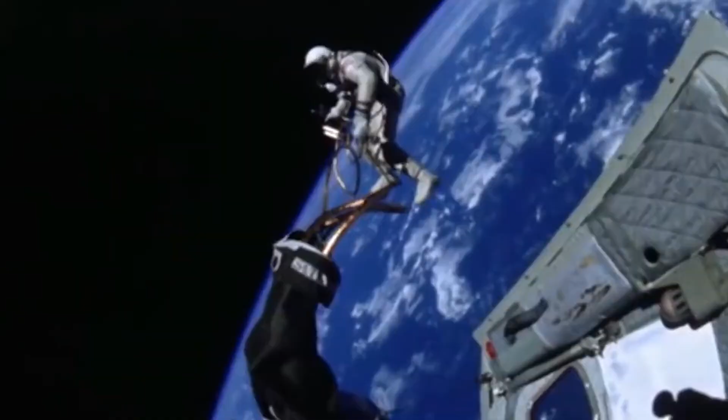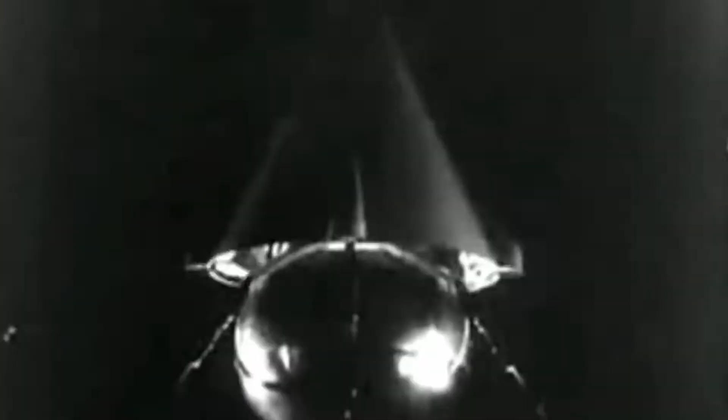On September 12, 1962, President John F. Kennedy made his famous speech about landing a man on the moon by the end of the decade. At this point, NASA had just several hours of human spaceflight experience. Americans had accepted the space race would be won by the Soviet Union, who had already claimed the records for launching the first satellite and the first man into orbit.

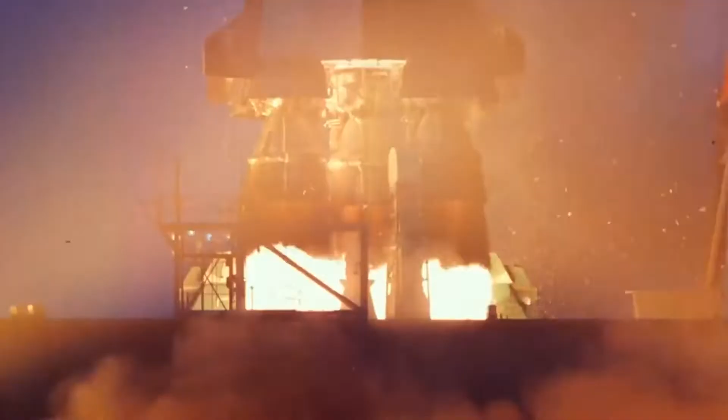In order to achieve their goal of reaching the moon, NASA needed to develop a much larger rocket with engines more powerful than ever before. But scaling up to a much larger rocket design sent NASA engineers into a new world of complex problems. In this vlog, we will tackle the problems encountered by scientists during the space race regarding combustion instability in developing new rocket engines, especially kerosene-fueled engines.

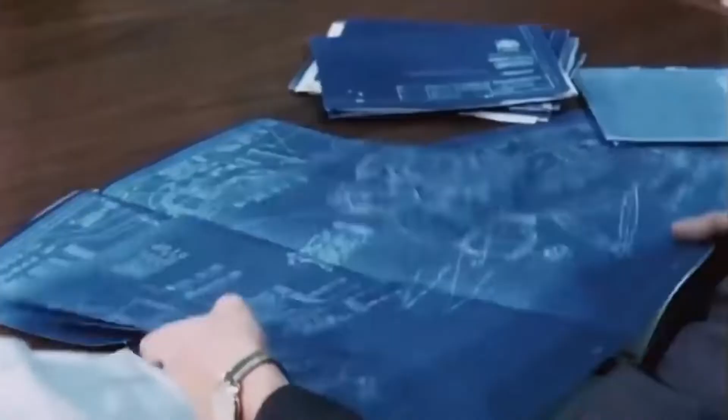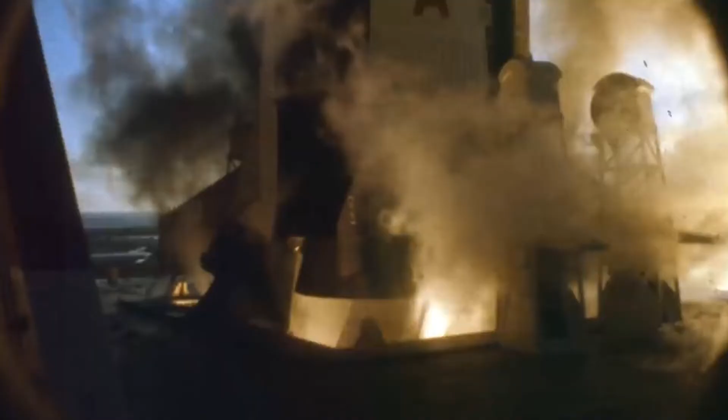Developing a new rocket engine on a much larger scale is extensive and expensive. This is because it needs the ability to capture detailed measurements of combustion dynamics, a physical understanding of unstable combustion mechanics, and high-quality data to draw hypotheses. The reason people in the 60s were able to develop a kerosene-fueled rocket engine, like the Rocketdyne F1 engine used in the Saturn V rockets that took Apollo astronauts to the moon and back, is by using heritage design and extensive development testing to provide reliable and high-performing engines.

There are actually several types of engine cycles used in rocketry, but in this video we'll be focusing on the staged combustion cycle, specifically the ORSC, or Oxidizer-Rich Staged Combustion.

I think I forgot the definition of Oxidizer-Rich Staged Combustion. I think I have to ask Nora about this.

Hi Nora, I would like to ask if you know about the Oxidizer-Rich Staged Combustion engine cycle.

Hi Brendan! So, Oxidizer-Rich Staged Combustion engine cycle offers improved cycle efficiency and density-specific impulse by using hydrocarbon fuels with an oxygen-rich pre-burner exhaust as the oxidizer, unlike other engine cycles.

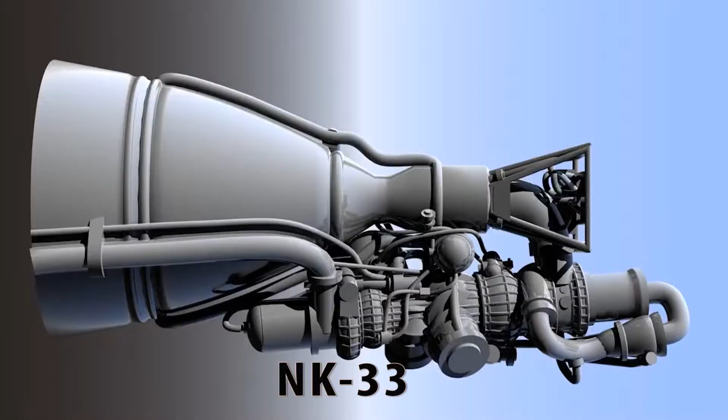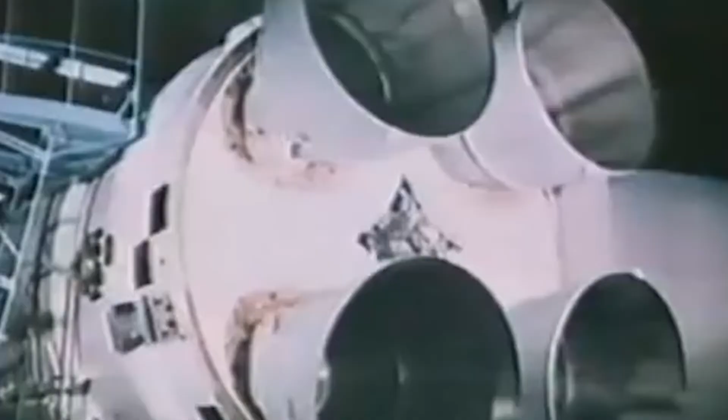This type of staged combustion engine cycle started in 1959, developed by none other than the United States' biggest competitor during the space race, which is Russia. They developed the NK series engine by Kuznetsov Design Bureau and the RD series engine developed by the Energomash Enterprise. These two series represent the most well-known, reliable, and high-performing ORSC engines.

Despite its advantages, the ORSC cycle also presents many challenges associated with achieving high performance efficiency. So another question is, what are the challenges in developing an ORSC cycle?

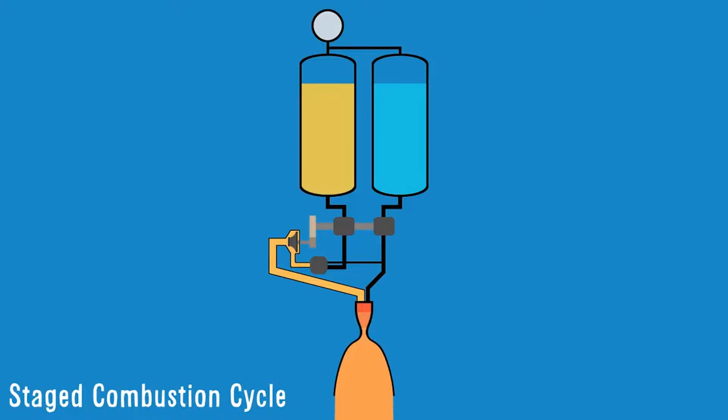One of these challenges is its high main chamber pressure that results in increased heat flux, or thermal energy transfer from one substance to another per unit time and area, denoted by temperature change. Second, it requires increased cooling and specialized materials to handle the aggressive oxygen-rich environment. Lastly, there's an increase in risk and severity of combustion instabilities.

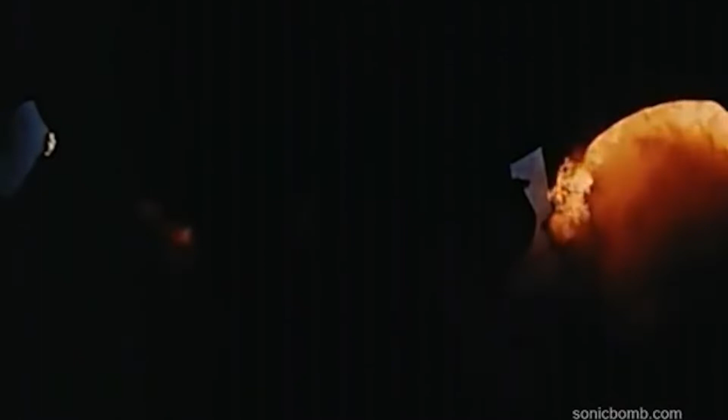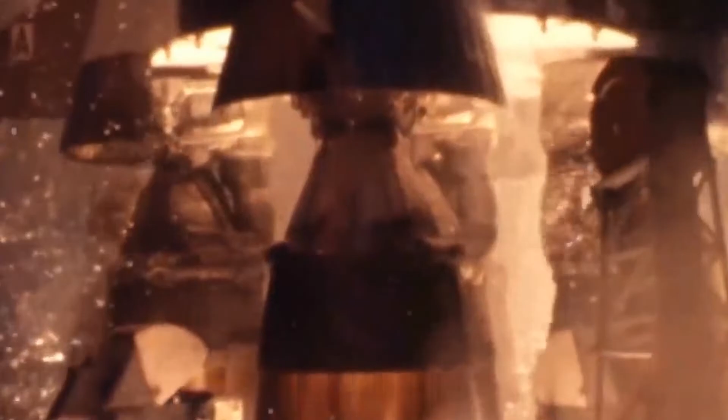The most well-known example of combustion instability happened during the development of the F1 engine. In order to lift the enormous Saturn V rocket, NASA required 5 F1 engines on the first stage, capable of producing 1.5 million pounds of thrust. To achieve this amount of thrust, massive amounts of RP-1 fuel and liquid oxygen had to be pumped into the thrust chamber.

Since it's producing that much thrust, how much fuel does it burn? The first stage can actually burn an Olympic swimming pool's worth of fuel in just over 2 minutes. Imagine how powerful that engine is.

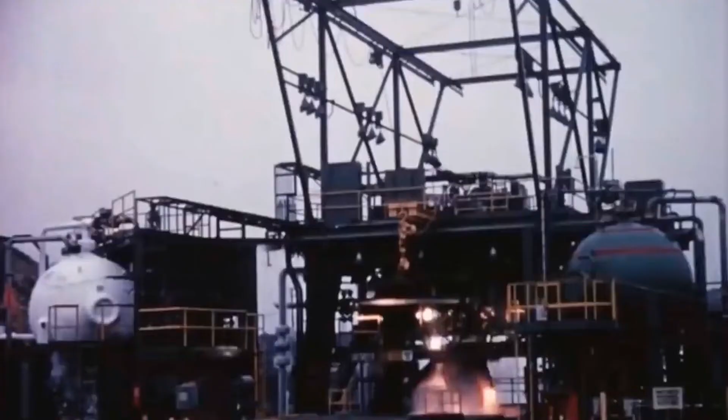Now let's go back in history to 1962. Rocketdyne was ready to perform a long-duration test of the F1 engine. As the test started, the turbo pumps spooled up and the test came to a catastrophic halt because the engine exploded due to combustion instability.

So wait, what is combustion instability? Combustion instability... okay, wait, let me search.

Combustion instability is where the propellants in the thrust chamber burn unevenly and cause enormous pressure swings inside the chamber. Since an engine of this scale had never been made before, the solution to the problem was not obvious.

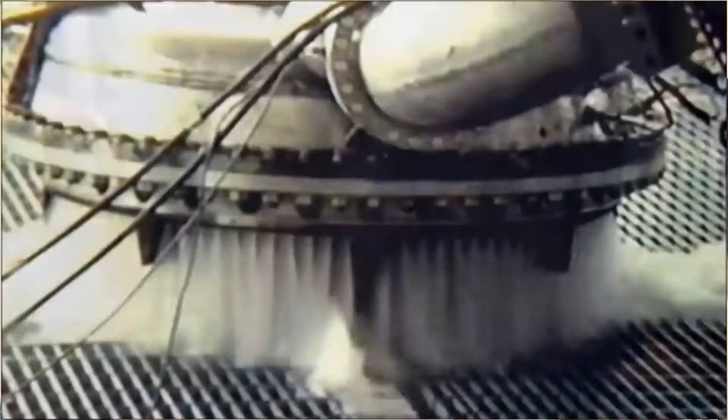Later on, engineers started to focus on the injector plate, which feeds the fuel and oxidizer into the thrust chamber. They took inspiration from the V2 engine to solve the combustion instability problem for the F1 by adding a series of baffles to the injector plate to split the combustion into different zones. Soon enough, the engine was able to execute a flawless burn.

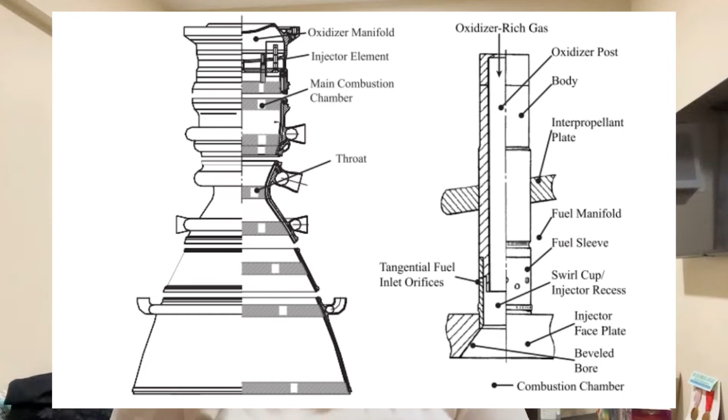Now let's talk about the prime example of Russia's high-performing ORSC engine, which is the RD-170. Like the F1, it also underwent a similar intense development comprising subscale and full-scale tests and analysis to yield a stable injector design like the F1's baffle elements.

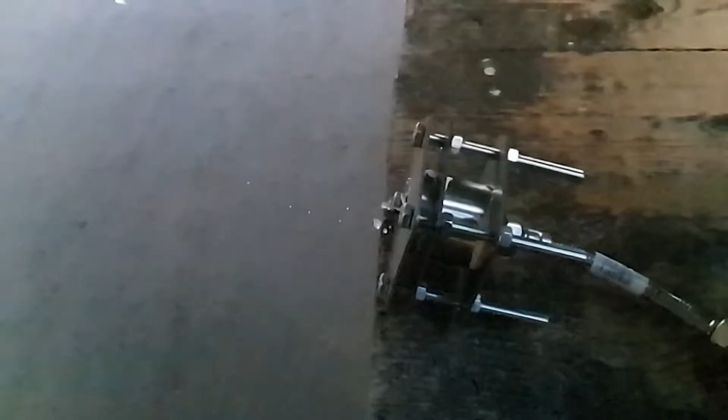The RD-170 main chamber injector consisted of several types of injector elements, and its primary injectors are the GCSC, or gas-centered swirl coaxial injectors, which are combustors designed to be unstable. This type of combustor encouraged the development of several validation studies as well as single-element tests to design multi-element combustors that would become unstable spontaneously.

What are the parameters that gas-centered swirl coaxial injectors have that affect the dynamics of mixing and the reaction between fuel and oxidizers? The critical design features of GCSC include the oxidizer inlet geometry, oxidizer tube length and diameter, geometry associated with fuel injection, injector recess, and the diffuser cone geometry at the injector face. The main chamber also included baffle elements that extended into the flow from the injector face to help dampen tangential acoustic mode oscillations.

So you might be wondering why I'm discussing all these things in this video. The reason is that we will be analyzing a journal entitled 'Detailed Measurement of Oxidizer-Rich Staged Combustion Injector Dynamics in Model Rocket Combustors' by M. Bernard, R. Gejji, and W. Anderson. In summary, their paper presents experimental results from a model rocket combustor that uses a gas-centered swirl coaxial injector element.

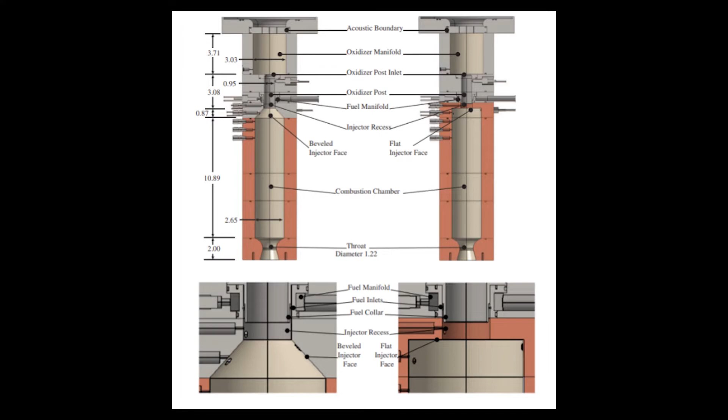The study wanted to validate the data from two combustor configurations using warm oxygen-rich gas and ambient temperature RP2 fuel. Their study also used the technique feature of the RD-170 injector: config 1 using the GCSC injector and features a beveled contour between the injector recess and the main combustion chamber, and config 2, the same injector configuration but without the truncated cone, so that the injector ended at a sudden expansion at a flat face inlet to a cylindrical combustion chamber, typical in Western Europe and United States design.

Moving forward to their experimental design, the proponents wanted to acquire validation quality datasets of a single injector element combustor to test computer simulation. They also designed the model rocket combustor to enable high-fidelity measurements of pressure and flame light emission with well-defined and well-characterized boundary conditions that can simulate or model. The main focus of the study is the high-frequency pressure field that provides direct quantitative measurements compared to simulation results.

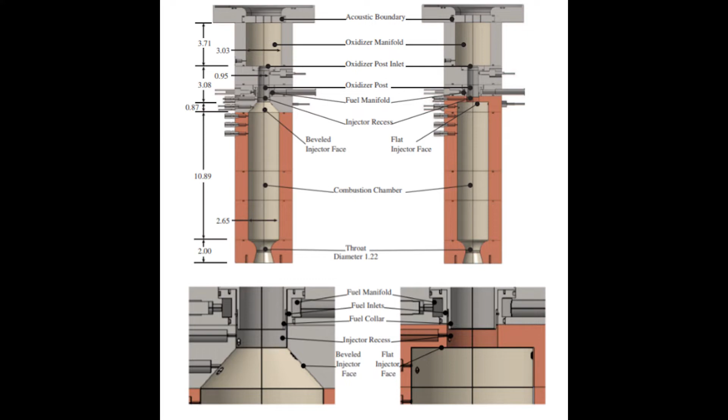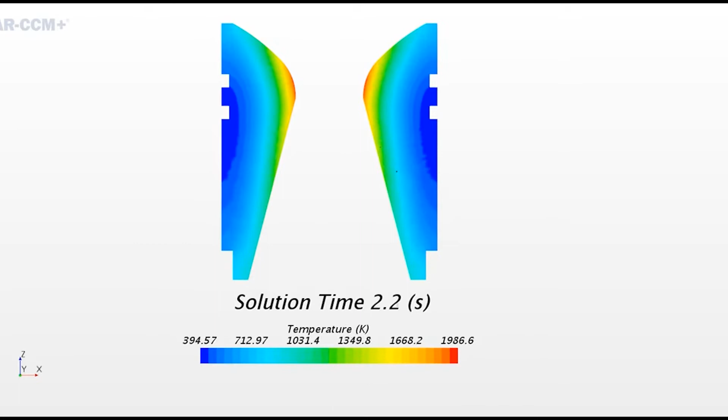Ignition is achieved in the pre-burner and combustion chamber via hydrogen-oxygen spark augmented torch light igniters that are extinguished after ignition of the main propellant flows, which is inexpensive, simple to operate, and reliable. The computational modeling of the environment will be facilitated by a sonic boundary located at the oxidizer manifold inlet and a sonic nozzle located at the combustion chamber exit.

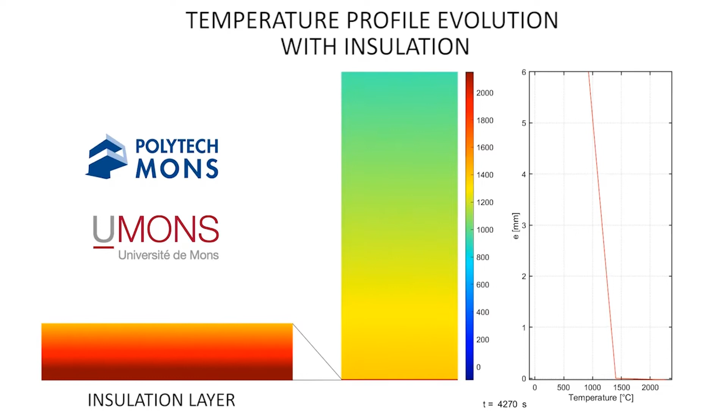The proponents also used a thermal barrier coating made of Yttria-stabilized zirconia, applied to all surfaces downstream to reduce heat transfer to the walls and approach adiabatic conditions where there is no heat transfer between boundary layers. Lastly, they also used an array of thermocouples embedded in the chamber to approximate heat loss in the system.

Okay, Nora. I think I get it now. Thank you.

As I said earlier, the study used two configurations: the typical flat face injector and a beveled face injector, in which there is a conical expansion downstream of the injector recess. The bevel design was inspired by the RD-170 main chamber injector.

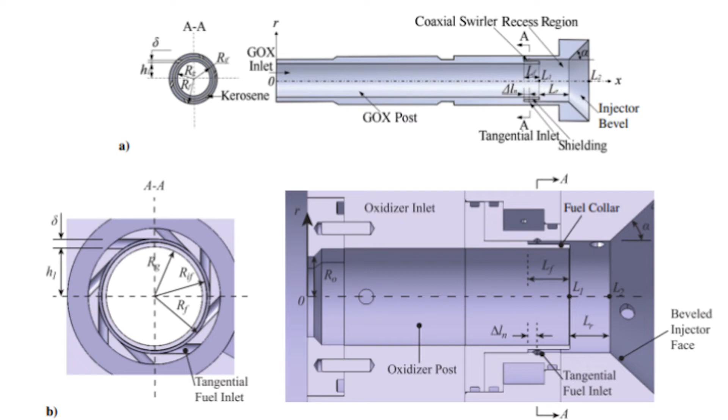Moving on to the results of the paper, analysis of the pressure data recorded from the selected validation case of each configuration is compared to the target value. Three computational modeling analyses were performed by the proponents, and let's tackle them one by one.

And I think I know who to call. Then I'll call the Space Cowboy.

Hi AJ, I'm now discussing the three computational modeling analyses performed by the proponents for my blog. Do you want to say something about it? Right now I'm in the middle of my otaku conference, but about computational modeling, yeah, I have facts and something to say about it. So where can I start?

In the first computational modeling, where the proponents analyzed the combustor performance, they summarized each configuration by the amplitude of dominant longitudinal instability modes in the combustor, based on a calculation of the power spectral density of chamber pressure signals. The test started with ignition of the oxygen pre-burner that generates warm oxygen injected through a choked distribution plate, allowed to stabilize before ignition using the torch igniter.

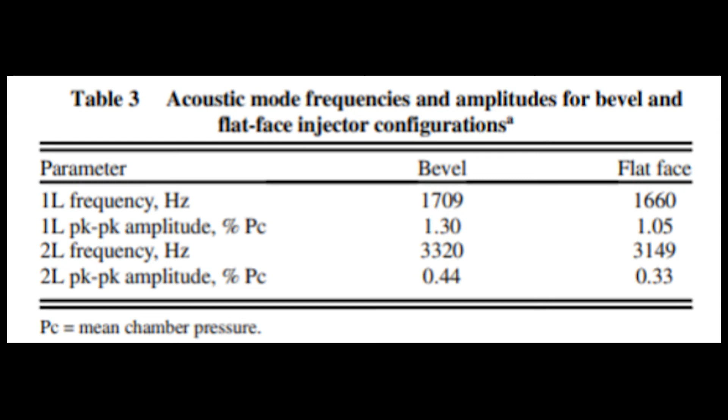The study found that a relatively low amplitude bulk mode fluctuation near 320 Hz was observed at all measurement locations. They found no correlation between the high frequency oscillation amplitude and the bulk mode oscillation amplitude. Lastly, the total heat loss was estimated at 1% of the total flame energy release, so the adiabatic wall assumption may be adequate.

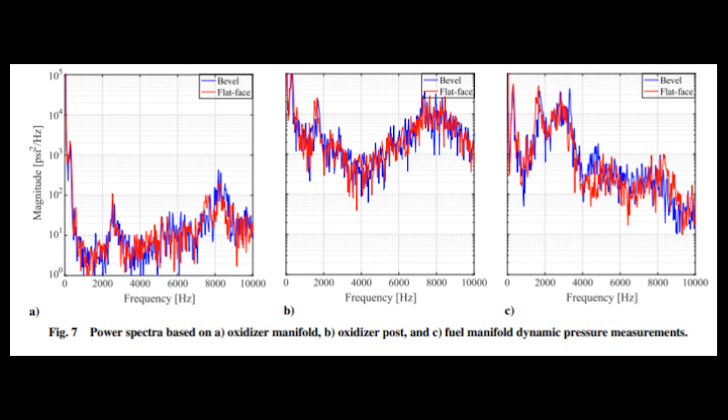The power spectral density, or PSD, of pressure signal in the combustor indicates the average signal power associated with specific frequencies. The PSDs of the oxidizer manifold and oxidizer post pressure reveal nearly identical frequency content in both injector configurations, because the oxidizer manifold post geometry and gas properties are closely matched, and coupled interactions with the combustion chamber were minimal.

Higher frequency content excited near the injector face by the beveled injector gradually damps out. Power spectra at the chamber aft end indicate similar response between configurations, comprising primarily acoustic mode content.

The following tests involve the longitudinal pressure mode shapes, concerning the flame change response to the chamber acoustic modes. The power spectral density analysis shows that changes in amplitude of the oscillation at longitudinal mode frequencies occurred at different axial locations in the combustor.

The nature of the fundamental longitudinal pressure mode shape is revealed by applying a zero-phase Butterworth bandpass filter to the pressure data, centered about the measured first longitudinal mode frequency with a 5% cutoff bandwidth. The test showed that the reduction in local amplitude of the acoustic mode in the bevel injector configuration occurs near the expected location of higher energy release near the injector face.